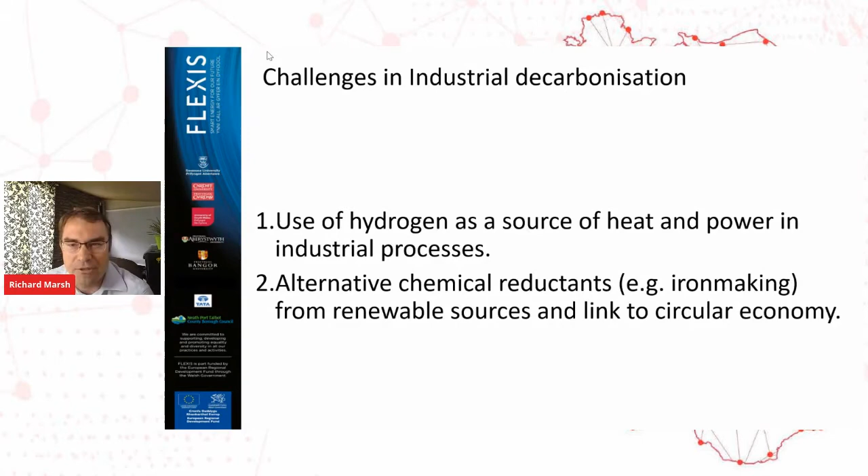So how do we actually take carbon intensive ingredients into primary and very large industries and convert those over to decarbonized feedstocks, which is quite a significant challenge, because this is kind of how we've done things for literally hundreds of years. Alright, a little bit of background then.

The good news is, from an academic point of view, there's lots of work to do, lots of things that need to be done. I'll focus just a little bit on iron and steel making, because that's something of great relevance within South Wales and Wales as a whole.

Iron and steel accounts for 2.6 gigatons of emissions per year. It's the biggest point source of CO2 and other greenhouse gases among the heavy industries. There's certainly increased demand for steel as we go forward, and it's not just about recycling - we'll always need primary manufacture of steel because the stuff just corrodes away, so you'll always need to replace it. If we stick to a business as usual case, we're looking at 65 gigatons of CO2 equivalent per year as we go forward into the future.

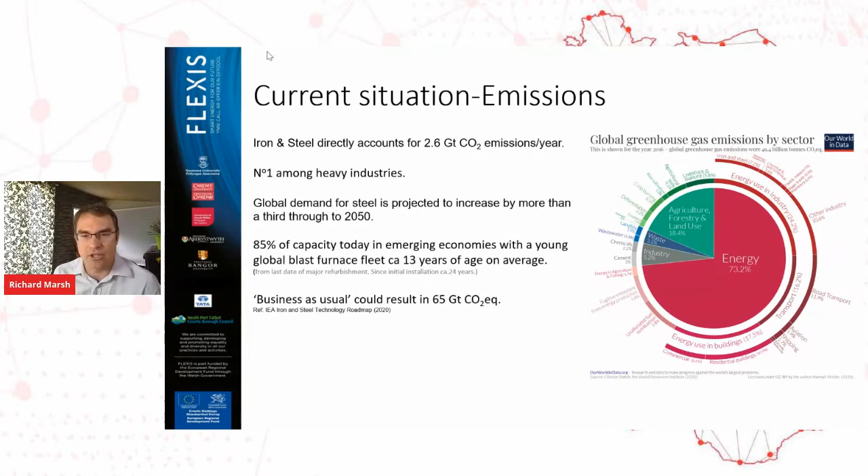So there's lots of potential here for decarbonisation, but there's lots of innovation that needs doing in the meantime. This is where we get to the crux of the problem, you see.

First of all, they can't easily be converted because one of the key reasons is that heat is the issue here. For primary industry, it's normally heat that they're trying to raise, which is why simply replacing it with electricity causes costs to go up, and then we don't get so much economic sustainability.

The next one is normally, especially in steel making, we need some kind of chemical reductant in the process. It's not just about heat or energy or motive power - it's actually about providing that chemical feedstock in order for the process to actually work. So how we normally do that in ironmaking is by the injection of coke, which comes from coal, which, as we all know, is highly carbon intensive.

The next one that I think is of interest is that where there is a need for chemical feedstocks, they tend to come from vectors that are carbon intensive themselves. So if you're an industry manufacturing a chemical product, for example, you're going to need some primary product to get in there - it could be as simple as kerosene - but you'll need to get that from a non-carbon intensive vector, which is where part of the problem is.

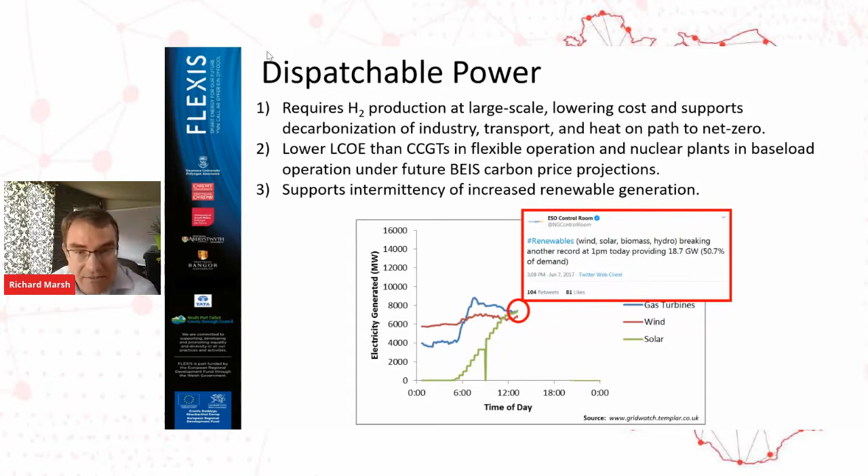This is a tweet that was put out in 2017, but it's probably more relevant today than in 2017, where National Grid was tweeting that their primary source of energy at that particular time - you can see the timestamp, it's around 1pm on June the 7th - the primary source of electricity in the United Kingdom was more renewable than non-renewable sources. That's a fantastic achievement. But let's look at what happens if you follow the subsequent time frame to see what happens in the hours afterwards.

Well, the sun went down and the wind stopped blowing so much, so they had to turn to gas turbines to support the grid. So what I'm trying to say here is that we need dispatchable power in the future.

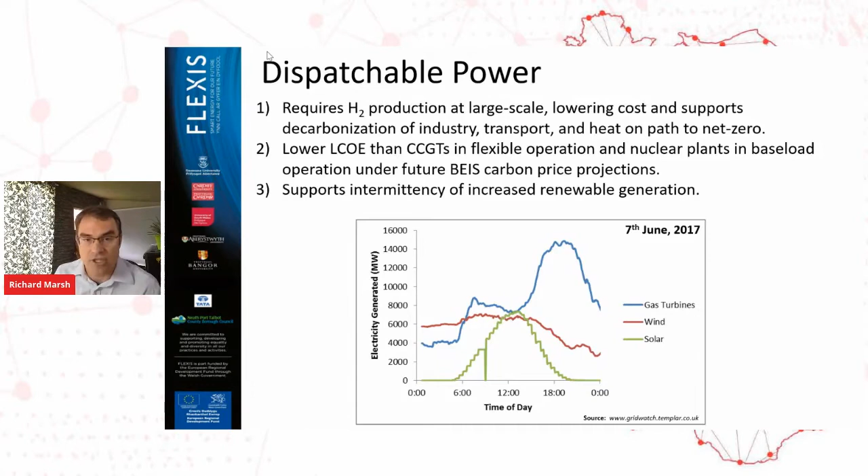It's likely to be gas turbine based, but that source of power needs to be low carbon, not carbon intensive. That's putting pressure on gas turbine systems to use substances like hydrogen, ammonia, or some engineered product from a low or negative carbon source to fill the gaps and keep a dispatchable, flexible, robust power generating system, especially in industry, because you have issues like demand side management. So how's that going to pan out?

A good enough example is that you wouldn't put diesel in a petrol car or vice versa, because the engine isn't necessarily compatible. It certainly isn't compatible with switching fuels.

In gas turbines, the big push at the moment for research, which is why it's a fantastic area to work in, is to look at how we can get flexibility as we start to add in these interesting, extremely variable fuels. It's one thing to develop an engine that works 100% on hydrogen, but the real challenge, the holy grail, is a flexible engine that can work across a spectrum of fuels.

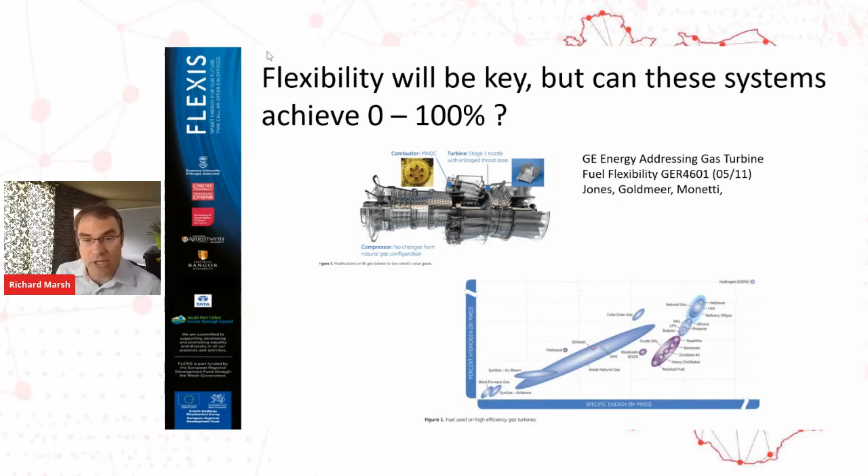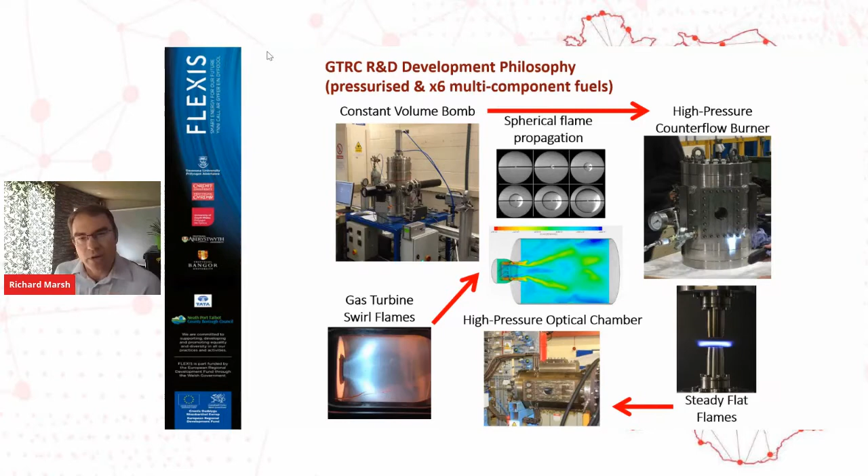What you'll need for the solution to this flexibility problem, and there are a lot of solutions coming out now, it's normally very complex geometries that can deal with these fast burning fuels. This is where the action is for us: producing these very complicated shapes and then managing to test them in our rig.

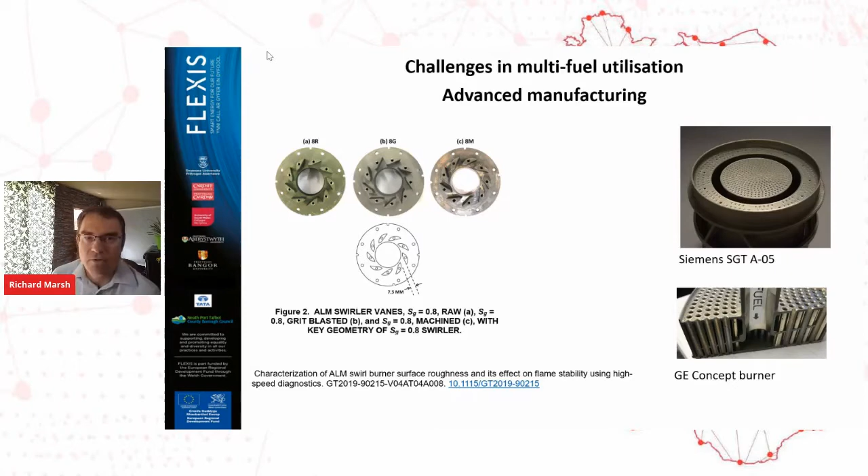If we look at some of the industrial impacts, there's the Hy4Heat project, which GTRC have been involved with, advising this consortium on what's going to happen for gas turbines and industrial heat if we start adding more hydrogen into the grid, a definite possibility for decarbonisation. When electricity is abundant, you produce hydrogen, which then goes into the grid, or it could be produced via natural gas cracking with carbon capture and storage.

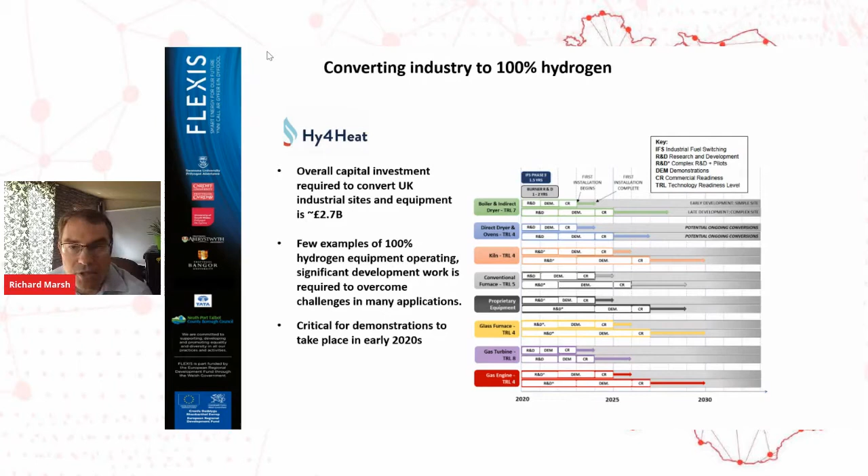All right, so moving on to the other part of my talk, I said I was going to talk about alternative reductants from renewable sources, but let's actually keep on the hydrogen theme here and look at what's likely to happen in terms of ironmaking.

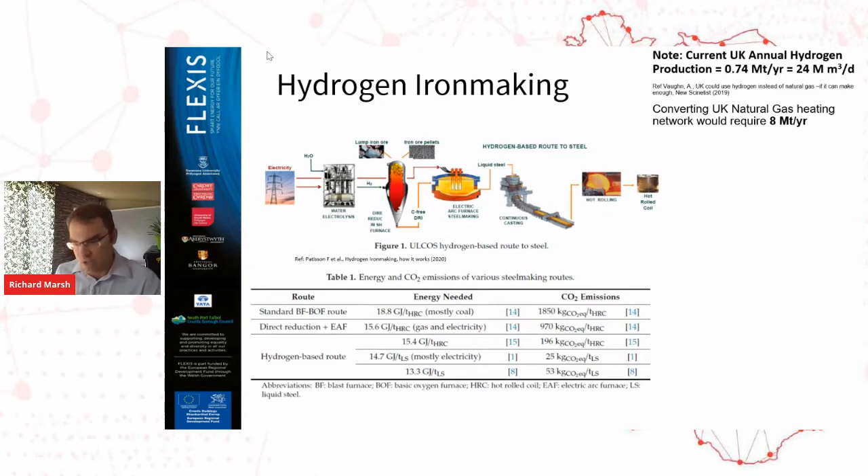Now, these are processes which are being developed and in places used all over the world. We've probably heard of electric arc furnaces, but in terms of trying to feed them with primary products that are low carbon, we're likely looking at direct reduction using hydrogen. Rather than coke as a primary input, we'd use hydrogen produced renewably or with carbon capture and storage, so the iron is pulled out of the ore using hydrogen rather than carbon monoxide in a blast furnace or carbon-based process. These are in development—they have huge potential to reduce CO2 in iron making, but there's lots of work needed. I'll show some examples of what we're interested in.

There's also the electric arc furnace, which relies on recycling material, but you can't really recycle steel infinitely, so there always needs to be some primary input. This, I think, is where the interest from UK PLC lies: do we go along the lines of recycling, or do we still need some kind of reduced iron process? If that's the case, we're looking either at renewable fuels, low carbon fuels, or directly at hydrogen.

So this is something we've been looking at with my colleague Julian Steer—whether or not waste plastics can be used as a reductant in the iron making process. We've all heard about the modern controversies with sending plastics away to supposedly be recycled across the world, only to see them washing up on beaches. This idea of injecting really low-grade plastic that's never going to be recycled into processes like blast furnaces or for direct reduction is of real interest to the industry, provided they're non-chlorinated, of course.

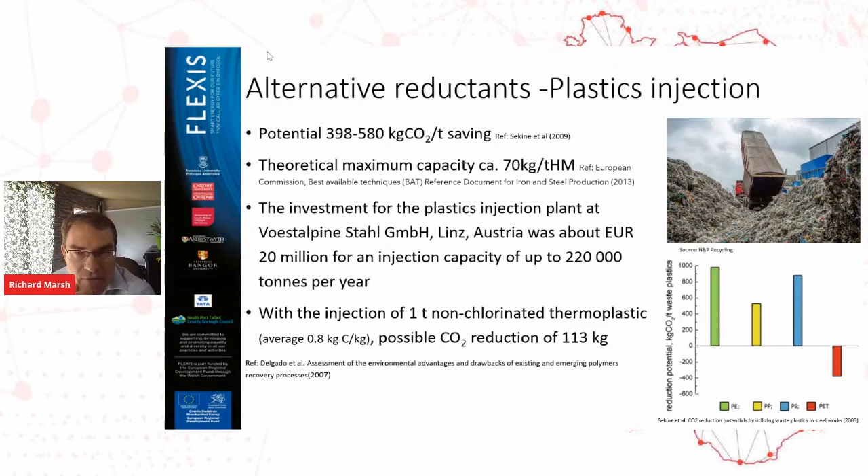So you can see this is an example of the material. It represents huge savings—I'll just show you what it typically looks like. Hopefully you'll see the video in the next slide. So what we've got here are actually two of the same kind of coal, just machined to different sizes.

But this is actually a very good analogy for what happens when you put high hydrogen or high volatile material into a process such as a blast furnace or a high temperature petrochemical process. On the left, we've got very nicely behaved material going through the heating process, heating up and starting to chemically react. But on the right, you're treated to something more like a fireworks display, where the material is actually fracturing and splitting apart before it starts to react. You can have problems with dust being formed in processes like this, or very unstable chemistry.

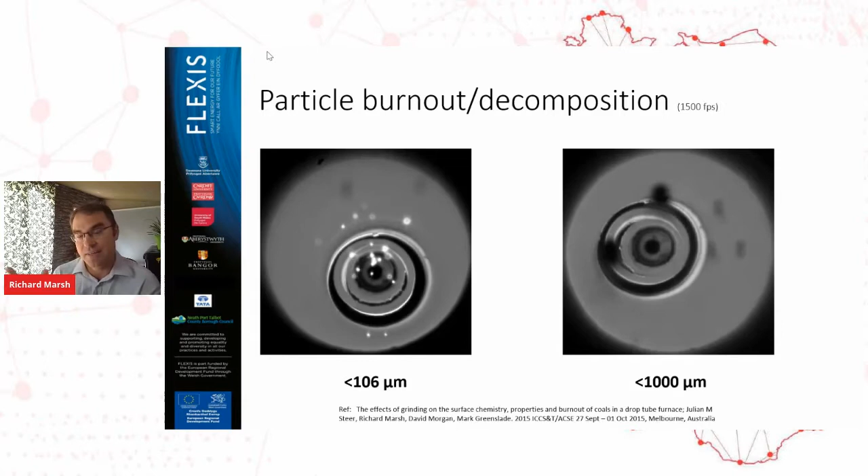Now, from an academic point of view, this is fantastic because it gives us good industrial impact for fundamental research that we like doing in the lab.

So I'm just going to finish now describing the CDT we have at Cardiff—there are also other CDTs available, I don't know if Dave's going to talk about them in Swansea later. This is a collaboration between Cardiff, Sheffield, and Nottingham, where we provide high caliber doctoral students into industrial challenges, working directly with industrial partners while doing research on low carbon, particularly resilient decarbonized energy—essentially keeping the lights on. The research challenge is chosen by the industrial partner, and this is very good value for money, if you don't mind me giving the hard sell for a second, for industrial partners to get good people on board and look at these modern processes and problems, as well as getting good training.

All right, so to summarize, rather than using words, I'm actually going to use a picture. This should be familiar, because this is a diagram of the South Wales Industrial Cluster. This is where I see the collaborative work between universities and industries going in the future, which is where everything comes together for an integrated approach to resilient low carbon energy and primary manufacture.

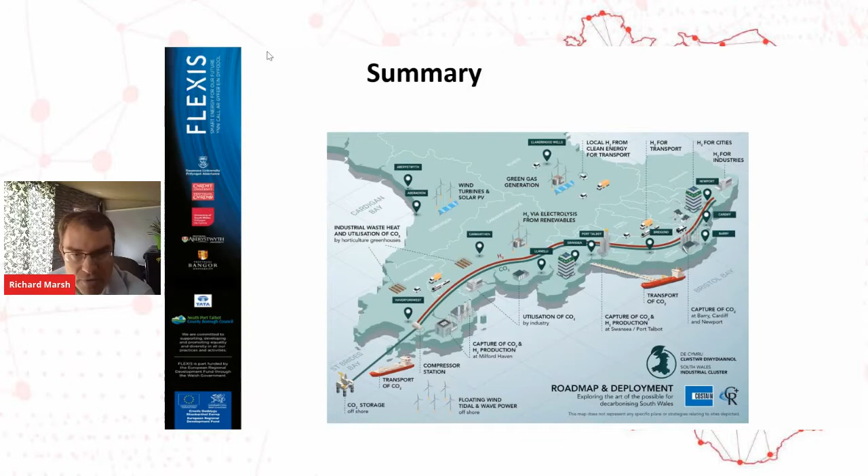So this will involve either hydrogen or ammonia or low carbon fuels in a fully integrated network with CO2. And if you do your homework properly, you can turn CO2 into an opportunity, not just a problem, whereby renewable energy, carbon capture, and renewable fuels are being used in conjunction, such that each industry is potentially feeding into the rest. I think this is where the future is going to be, and it's a great opportunity for us to work with industry and do some high impact stuff.

Okay, thanks very much. I'm going to hand back to you, Jon. That's me done.

Jon, you're on mute. Oh dear, someone had to do that.

Okay, thanks, Richard. And fascinating. I'd encourage anyone in the audience to... So Richard's talked to us about hydrogen and the role of hydrogen or alternative fuels for dispatchable power in gas turbines, the potential alternative reductants, and also the Centre for Doctoral Training. So any questions from the audience on any of those issues, we'd welcome, and we'll try and capture those for the end.

Okay, so if I can now share my screen again. We're going to move on to my colleague, Professor Alan Guwy, who will introduce himself. In fact, Alan and I will do a bit of a double act. I didn't introduce myself at the start, so I'm the Director of the University of South Wales Hydrogen R&D Centre, and I'm also the academic lead for the South Wales Industrial Cluster. We'll say a little bit more about that, but I'll pass to Alan, and then Chris, if you'll allow us, we'll do a bit of a double act on this session.

Good afternoon, everyone. Just wait for the plane to go overhead. Jon, can you put up the next slide?

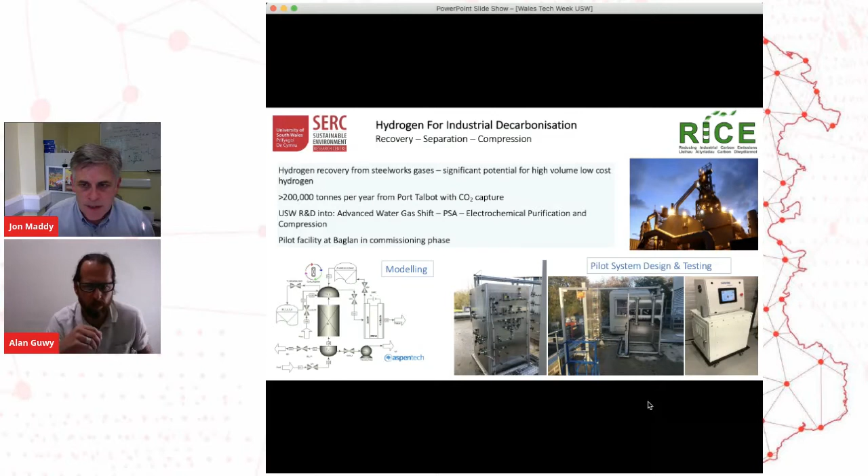So I'm going to switch to Alan now. Hopefully we're not taking up too much time. Alan, I'm going to switch to you now, if that's okay.

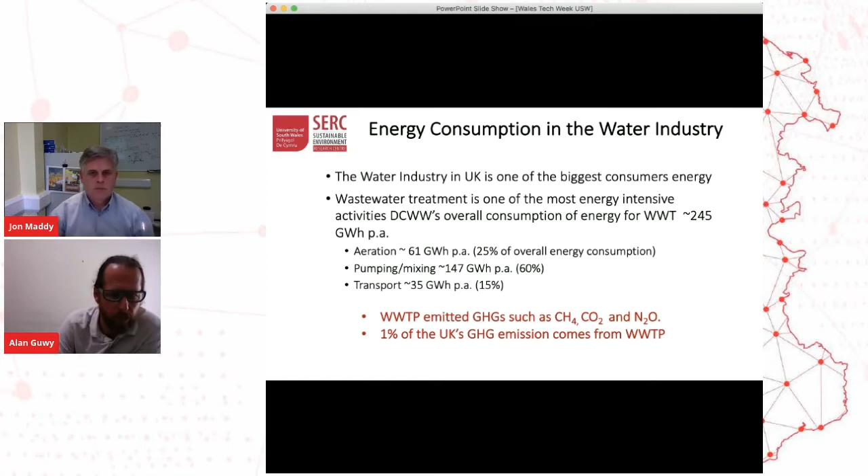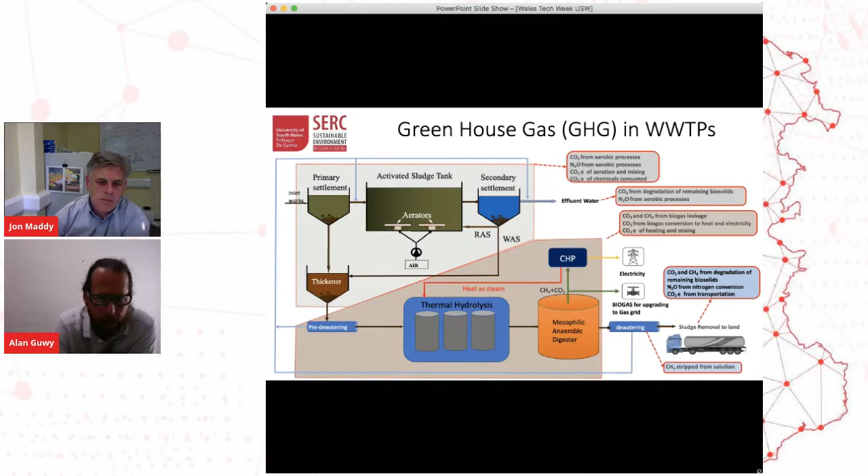Okay, you can see this in this standard flow schematic of what a sewage treatment plant is. On the top left-hand side you'll see the aeration process, where air is pumped into a tank - you've probably flown over them in planes, and you can see the huge football-size tanks. Basically that's where the biology works, and it's energy intensive to get that air through and mix it.

And then what happens is it converts that sewage, about a 50% reduction, into effectively another sludge, which is then settled.

And then you go through another stage, which is the anaerobic stage, just below that in the brown shaded sector. Again, you're using more energy here with thermal hydrolysis to make it more digestible. And then you can regain some of that energy by converting to methane through anaerobic digestion, which I've been working in for more than 30 years.

The downside, of course, is that although you're producing energy in the form of methane, you get fugitive emissions. We've learned this now over the last 20 years, that actually about 4% of the gas that's produced is actually emitted into the environment. So you have significant issues there with greenhouse fugitive emissions. And across the whole process, you've got CO2, nitrous oxide, and indeed the transportation of dewatered sludge backwards and forwards to various parts of the process, and then eventually to land. All of this has emittance of greenhouse gases.

So we need to do something to change this whole flow sheet. And that's what we've been looking at. So next slide, please, Jon.

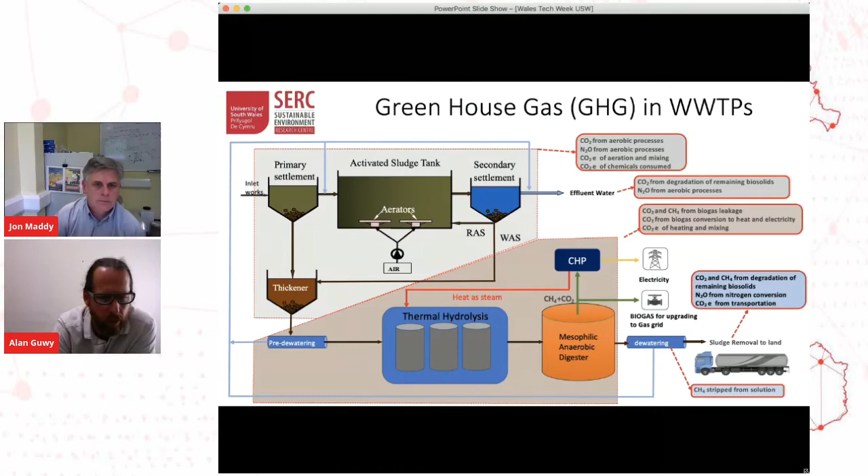So this is where we talked about the interfaces of where we work with hydrogen, water, and waste. And we've come up with a process that we've termed OxyHyH2O. This really addresses the sort of issue around electrolysis. We all know about hydrogen being produced in electrolysis, whether through PEM or other types of electrolysis. But the oxygen is usually allowed to just discharge to atmosphere, and that's got value. And actually, what we identified has got significant value if we were to use that in the aeration treatment lane.

And in fact, we should be able to reduce the footprint of such tanks, if we put a cap on it, certainly, by 100 times. And then we'd have to work out exactly how much oxygen we would need to do that. Well, we need roughly about 39 kilotons per annum of oxygen to treat Wales's sewage. That would in turn produce nearly 5 kilotons of hydrogen in electrolysis, which we will most likely be doing anyway in the future. And that actually produces enough hydrogen equivalent for 35,000 fuel cell electric vehicles. And that's a revenue of £38 million, not discounting the benefits of the oxygen used in a much more efficient wastewater treatment plant if we can achieve that.

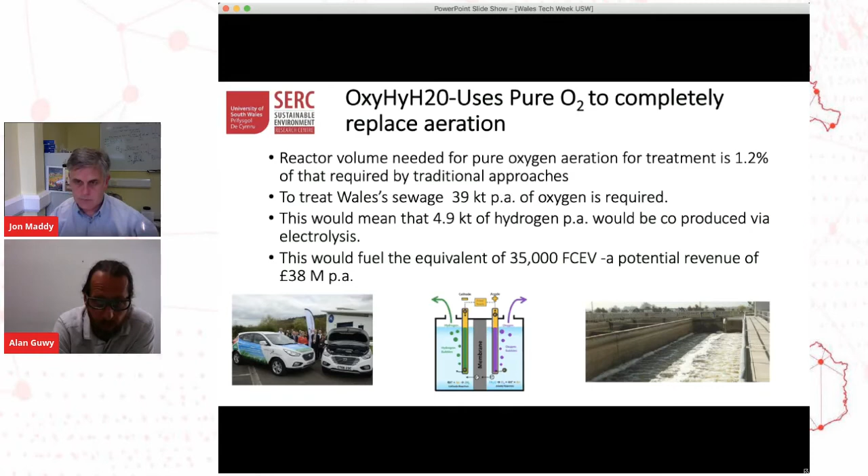We don't need to put air in at all. And so there is none of the wasted emissions. And in fact, if you think about it, you're actually only getting about 1 to 2% solubility of oxygen when you aerate with air. But with oxygen, you can keep it 100% or whatever you wish. And then because it's a sealed bioreactor, we can then, with much more efficiency, use membrane filter systems to extract the treated wastewater and other things in the wastewater that might be of value, such as nitrogen and phosphate and many other things.

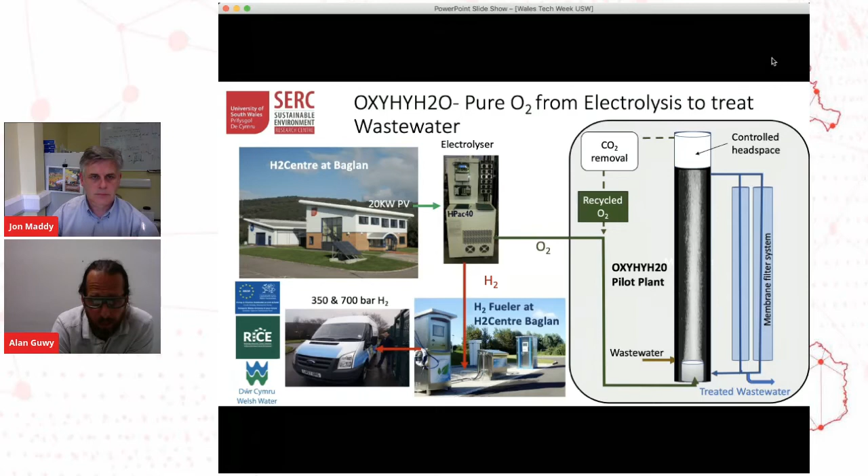And so this is the wastewater treatment option that we're going to be looking at in RICE. And the next example, next slide, sorry, Jon. Through FLEXIS, we developed a concept called the VFA factory. And this is taking wastes, waste gases, waste biomasses to produce carboxylic acids. And the one highlighted here is funded through the FLEXIS App project in conjunction with Tata and Welsh Water, where we're actually looking at the separated hydrogen that Jon was talking about earlier from the steelworks.

And of course, that can be used for energy and fuel, but it also can be combined with the CO2, which is also present in the syngas from the steelworks process. And in doing so, we can make these carboxylic acids, or VFAs, and the most significant one of those is acetic acid. And they have a value of around about £300 per tonne, so significant value.

And from that, you can make even more valuable compounds: bioplastics, biosurfactants, and many more. So acetic acid could actually become a green platform chemical of the future, and it could be sourced through waste gases or municipal wastes.

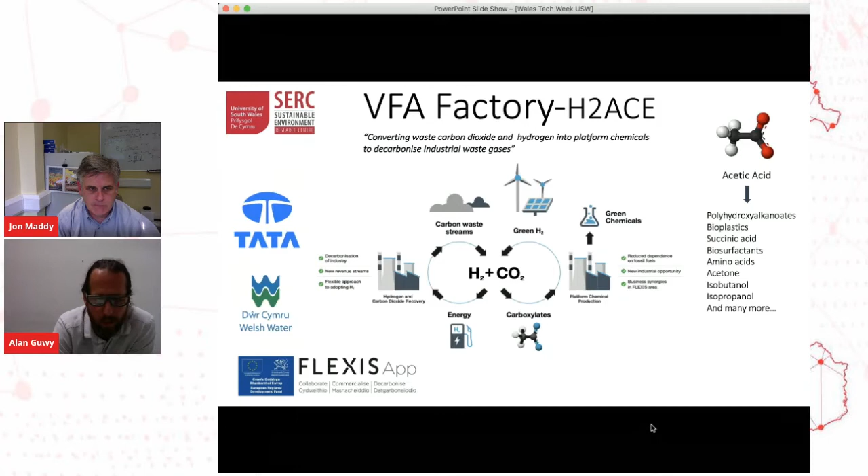Next slide please, Jon. Here you'll see the bioreactors we have in the lab, the top photographs. They use electrodialysis to actually extract these valuable VFAs.

The global value of these is already around 1.3 billion in the world, and it continues to rise at an ever-increasing rate. At the moment it's around 12% per annum, but I think this is going to increase significantly as we displace fossil fuel equivalents with green chemicals.

We already have a pilot plant funded through RICE at Tata, looking at conversion of carbon monoxide in the waste streams. And we're about to, through FLEXIS, place an H2ACE plant down adjacent to the COACE plant, which makes up part of the VFA factory concept.

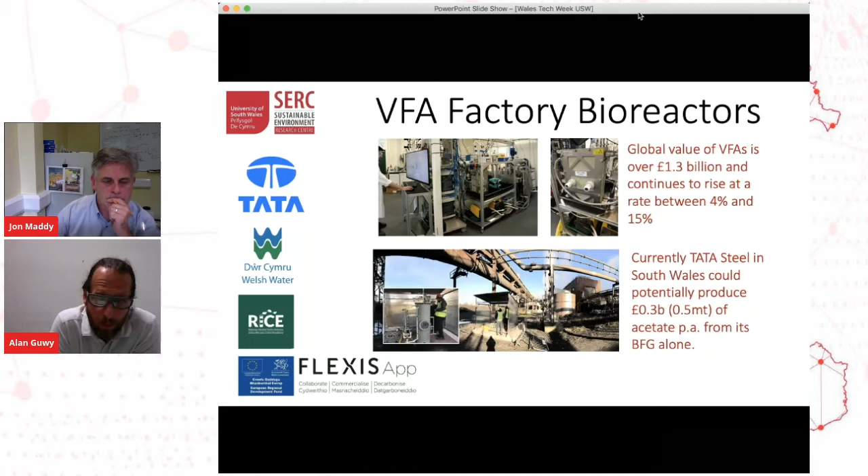We've done some calculations, and if you look at the value you can get from the blast furnace gas alone, it's in the order of £0.3 billion per annum. So roughly a quarter of the world market. So there's significant potential for capturing and using this carbon in green platform chemicals in the future.

So that's a flavour of the projects. And again, we must acknowledge all the fantastic support we've had from the funding bodies, but also the industry, without which we could not do the work. So thank you very much, and back to Jon.

Thanks very much, Alan. I'm just going to hand over to Dave, if that's okay. I'll hand straight to you, Dave. That's all right. No problem. Right, hopefully you guys can see the slides. I can only see the slides and nothing else.

So this is the last section here. I'm just going to summarise some of the work that we're doing at Swansea, also, but link it to the work you just heard about from both Cardiff and Swansea, and start off by explaining a little bit about where we're going in the future.

So why have I got these old pictures? Well, my dad took pictures of everything about industry back in ancient times, and also gave me a passion for science and solar power, which has driven my research career.

What we want to see, obviously, is transitioning our industry and society over to a net zero way of operating, which can be a trailblazer for the rest of the world. A lot of our work is, as you've seen from these previous presentations, funded by European Union sources. So one of the things we're working on now, because we've got two years left of that funding, is how we build an architecture that takes us through to 2050. So the first couple of slides explain a little bit about that.

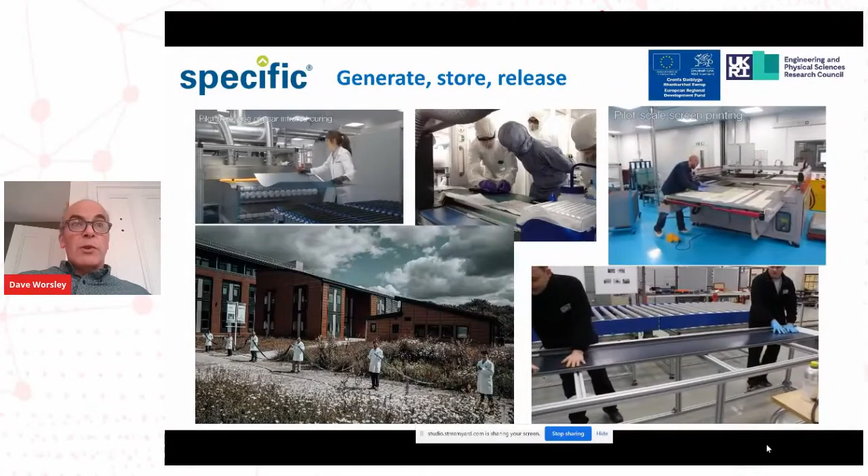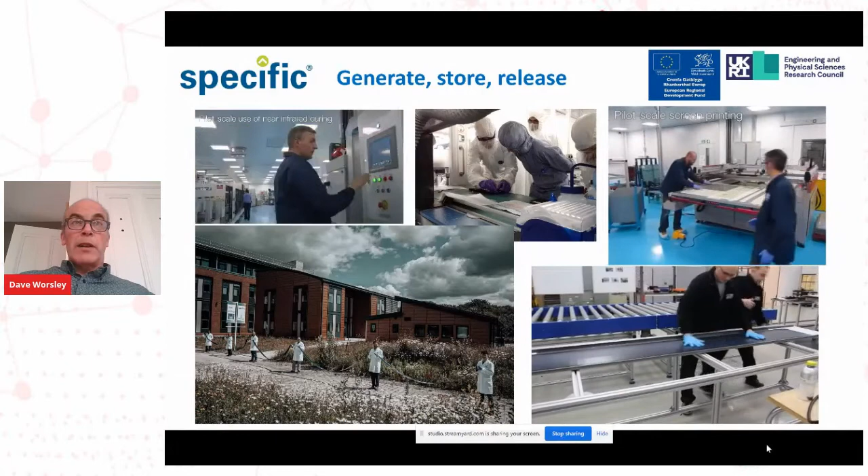Hopefully these videos work—if they don't, don't panic. There's nothing hugely significant there.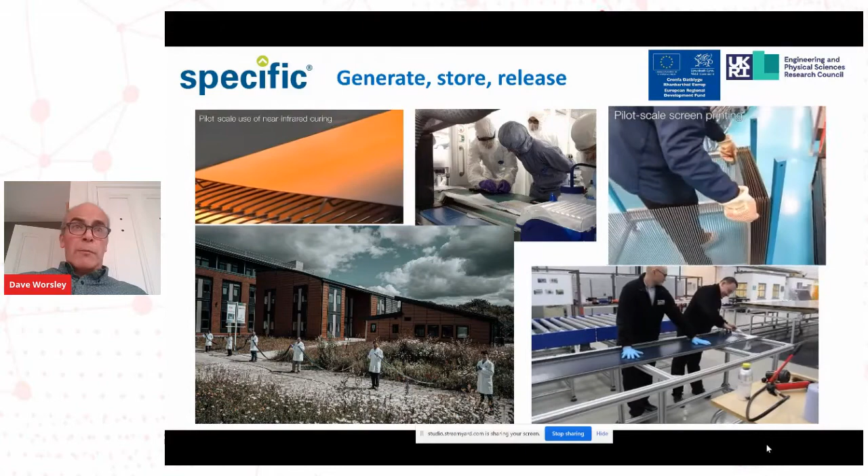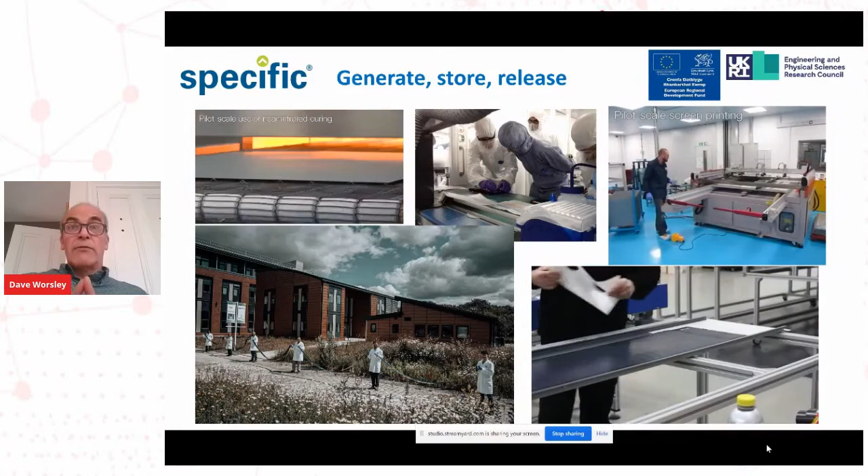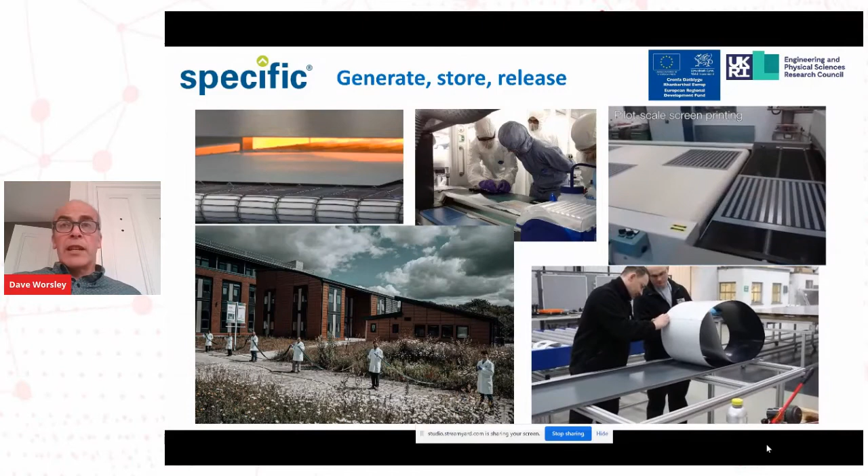What we've got in Specific is an innovation and knowledge centre funded by UKRI, via EPSRC, and also European Union funding, which is developing materials to generate, store and release energy. This includes solar panels, new kinds of printed solar panels, and different types of printed battery technologies, and release technologies that can release both heat and light, mainly for use in buildings at this point, but the processes we've got are equally applicable for making other materials, like electrodes for hydrogen evolution from water.

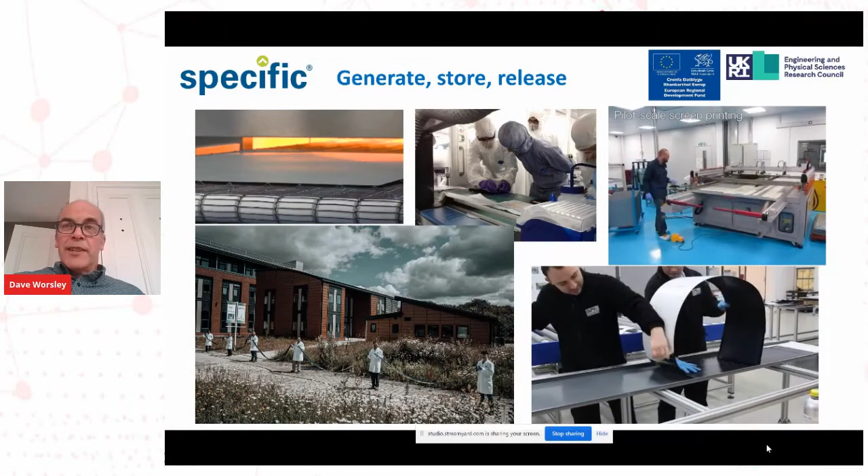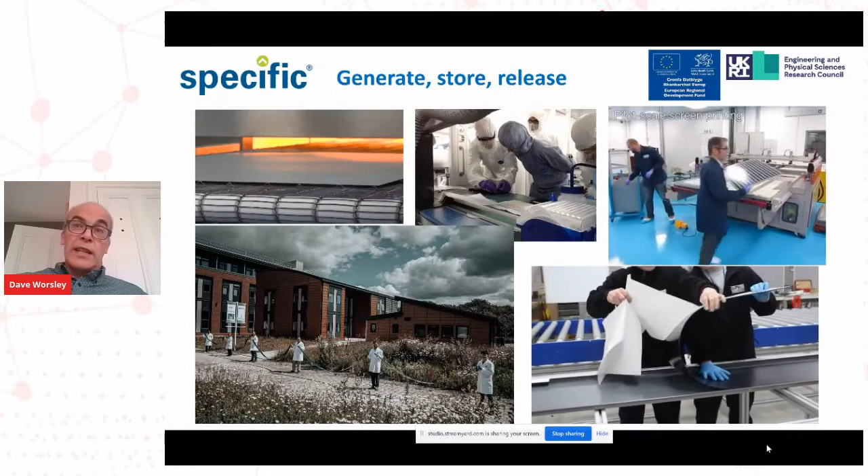The image of the two guys on the bottom right—that's unfurling, in Newport now. There's a factory set up by our colleagues at BIPVCO that are taking this technology, manufacturing it in Wales, and integrating it, in this case, into steel roofing. But as you can see, the membrane material could be laminated onto any kind of roofing product.

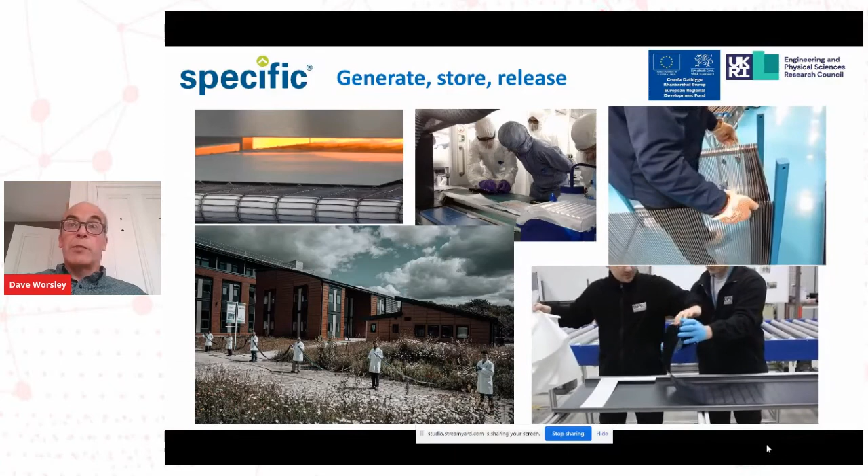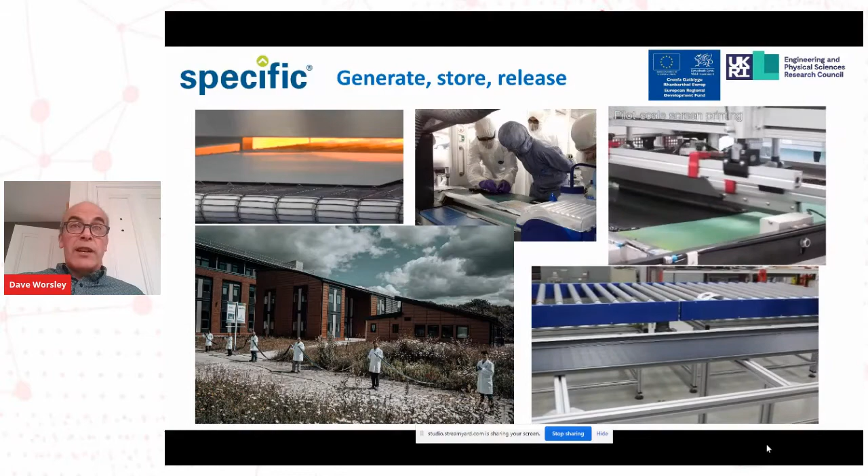Why am I showing you this sort of stuff? Well, for industrial decarbonisation, you've got some of the most exciting areas for this kind of technology, because you've got very, very large buildings. So as well as looking at the technologies of printing and coating of solar panels and so on, we're looking at how we can demonstrate that on real buildings.

What's been really interesting about this is how well it's worked as an experiment, and how we're now able to deploy these same sorts of buildings as classroom demonstrators in countries like India, in rural applications where there are no grid connections.

What that's aiming to show is that the office building of the future, supposing there is such a thing, is actually something that can generate power. And that's been powering my Nissan Leaf for the last 28,000 miles—not so much recently, because I sit on my Zoom chair and save carbon by not going to work. So that's another way of thinking about things.

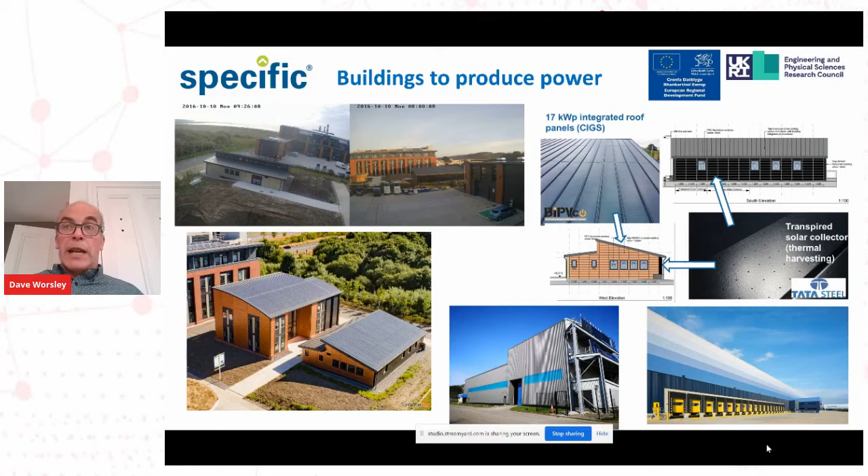It works very, very well as a technology, and is a way for industrial groups to actually think about their property not as an energy-using element, but something that can generate power, and then use that power on site.

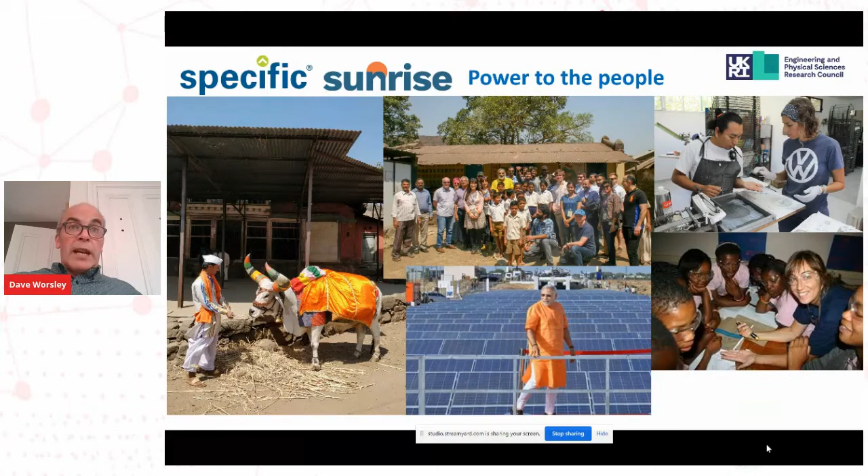We're taking this work overseas with support from UKRI, in India, also in Mexico—the top right shows some Mexican T-shirt printers looking a little confused, making solar cells—and also working in African nations, particularly in terms of bringing educational aspects of how to make low-cost solar work in those environments. As a technology, it has global potential.

We're using that as a heat store to create mobile heat energy. So again, thinking about waste that would normally be thrown away into the sky, waste energy, and how you can use that potentially to create heating in buildings, recognizing that about 30 to 40% of our carbon emissions in the UK come from heating buildings.

It's a very simple process developed by our team. They use this vermiculite material with a bit of calcium chloride on it. The calcium chloride is a salt that allows water on and off of it. You dry it using hot air, either from a solar collector or from industrial sources, and then that heat energy is trapped on the matrix until you expose it to moist conditions again. So it will store heat pretty much indefinitely.

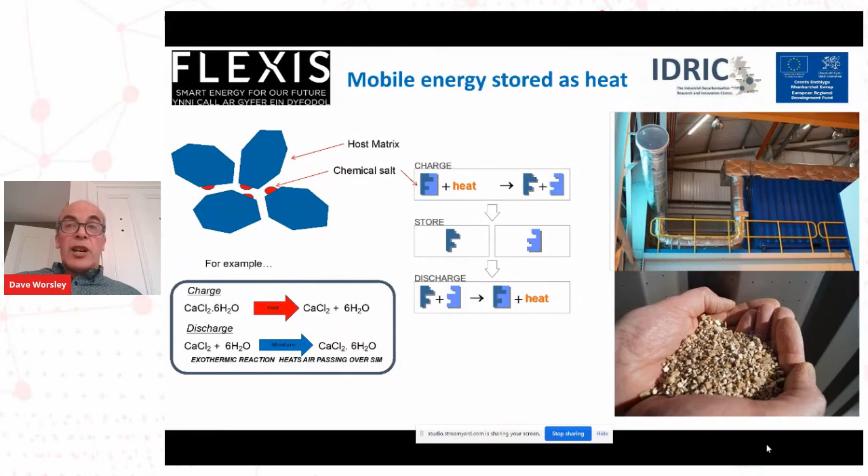But imagine how now we can use that same material in kind of bags, transported around for home heating and charged up using industrial waste. That's another axis that we're looking at.

So the third project I was going to mention is our Sustain Manufacturing Hub. This is very much steel focused because it's all about the future of the steel industry. It's a collaboration here with the universities in Wales, but also with Warwick, Sheffield, Durham and UCL. It links into a collection of the innovation assets in the UK - in other universities you've got WMG, you've got the Royce Institute and so on - bringing industrial questions from the steel industry, from the 5 UK steel companies, and trying to answer them and push technology through from the lab into the factory.

In essence, what we do is go all the way from the grand challenge of carbon neutral iron and steel making. Some of the work that Richard spoke about, that Julian's doing in Cardiff with Peter Holliman at Swansea, is feeding in there on using different waste materials as a carbon source. We're looking also at carbon capture and conversion, clearly, but also increasingly on how we can improve the quality of scrap, so that some of the issues of increased use of electric arc furnaces are not as problematic for strip steel as they would be if you just take scrap as it comes in.

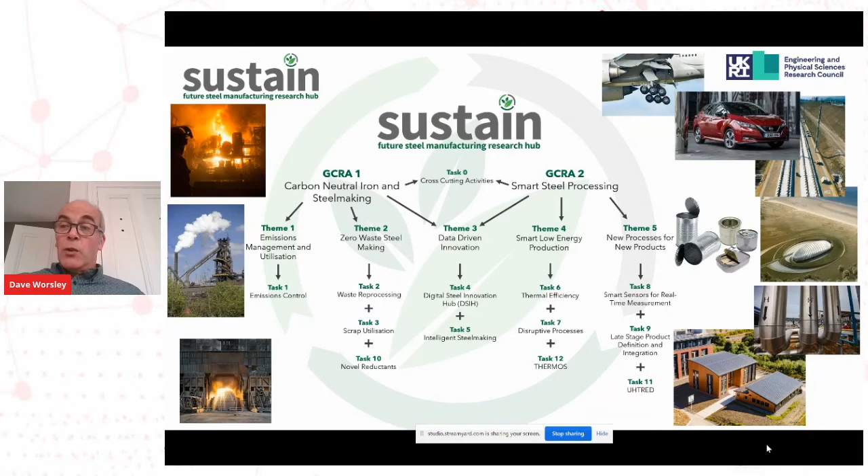And then all the way through into new products that will be the underpinnings of aircraft, electric and hydrogen vehicles, rolling stock, the rails for HS2 and so on, and even into power sources such as the SMR and hydrogen power sources that we will need in the future. Not forgetting really prosaic things like metal food packaging - a really useful use of steel, but one that requires really high quality steel to make it work, because some of the packaging materials are only 100 microns thin.

So a little bit about training and skills - this will be the last bit that I talk about. We've been working with the industry in Wales for quite some time, well, since '92 actually, on a kind of doctoral training activity.

And it's morphed over the years into something more of a training academy, which looks at doctorates, it looks at standard degrees, it goes all the way down into work-based learning, and has been very successful for supporting talent growth in our industrial cluster and beyond. There's some stats which I will just jump through, because I don't think there's enough time to talk about those.

Where we're going with this now is to take the concept to create a kind of switch on skills academy, which has a variety of skill steps, a little bit like what Alan was talking about before, where our universities work together all the way from high-level skills like postgraduate development and doctoral training through apprenticeships and work-based learning to retrain staff, all the way down into community activities and outreach in the schools. And I think this is really important, because it is going to allow people to develop their careers without any barriers, and they can change their careers at any point.